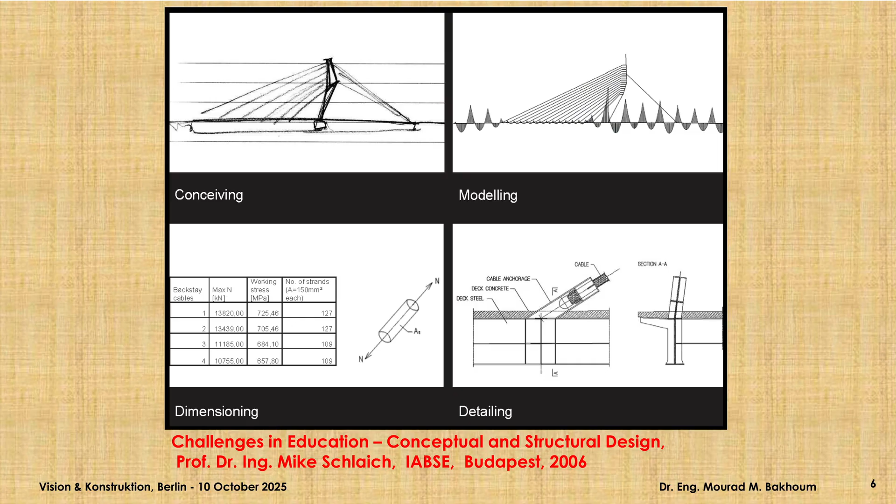Now I'm going to show a slide, which I wanted to say is the slide, but I thought maybe too much. So it's the key main summary slide for structural engineering education and practice. This slide Mike showed at the conference in Budapest in September 2006 in a keynote speech, Challenges in Education, Conceptual and Structural Design. It summarizes in a very nice way the stages of structural design: conceiving the concepts, modeling, structural analysis, dimensioning, and detailing. I use this in education, in graduate studies in particular, master students, and in my own thinking.

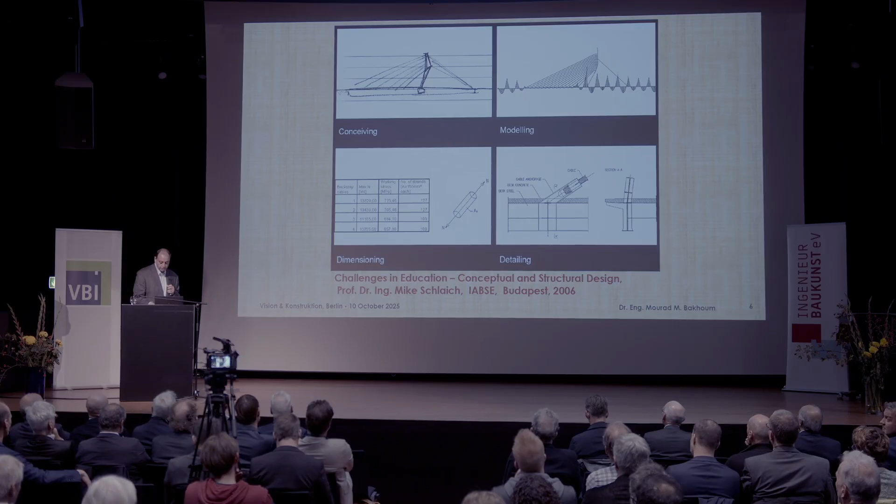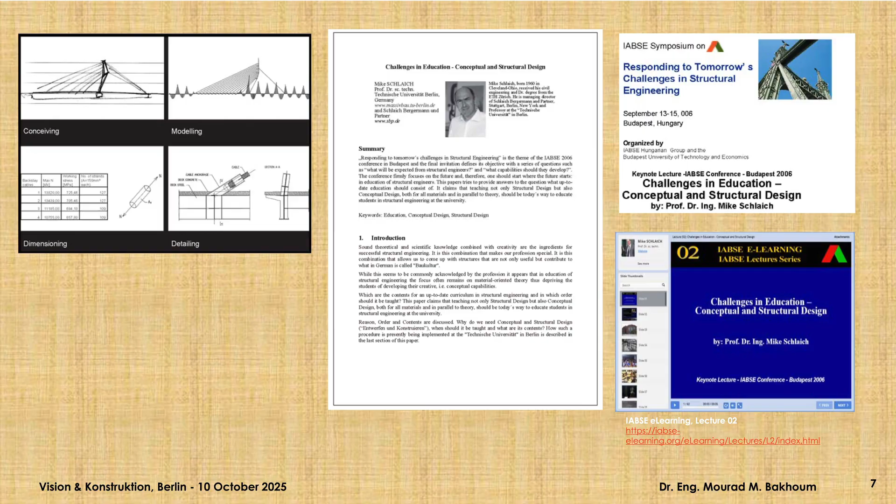And throughout the presentation today, I will try to show, to some extent, how this has affected the work I was involved in. So this slide comes from this presentation, this conference, and you can find it in the e-learning platform. If you just write Challenges in Education, the title of the presentation, and Mike Schlaich, IABSE e-learning, you will get the presentation in slides and audio. You can listen to it. It's very nice.

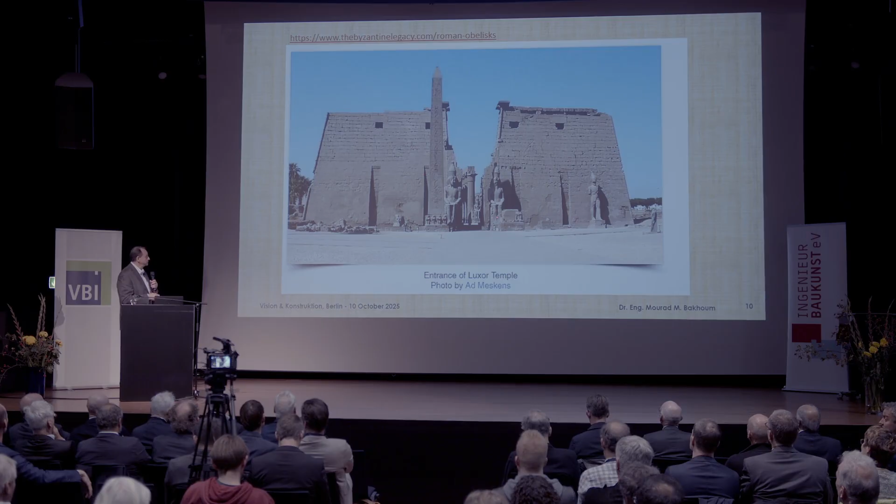So now, we'll talk about 2 modern obelisks, but at the beginning, we need to know some history. Obelisks existed in Egypt. This is in Luxor in the south of Egypt. This is the Luxor temple. There existed 2 obelisks. And the obelisks were built by the pharaohs starting about 3,000 years ago. So they are 1,000 years younger than the pyramids.

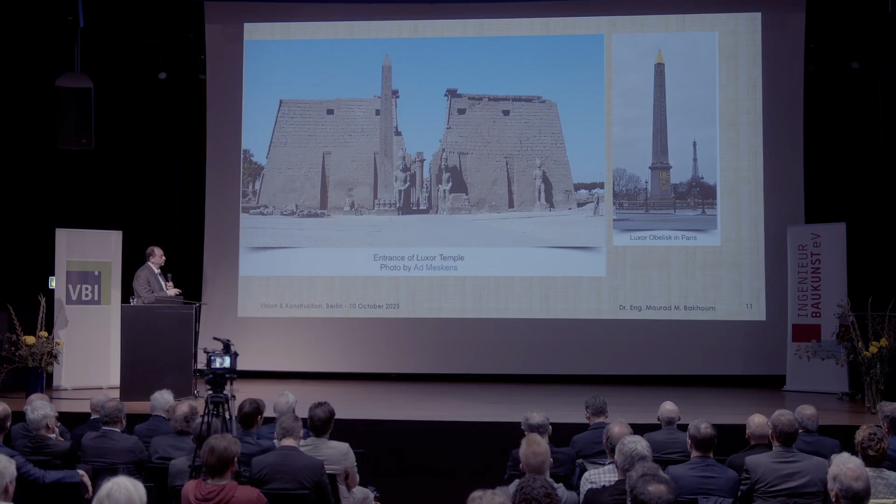And many other obelisks were transported from Egypt to Rome, especially from 100 BC till 200 AD, more or less. And then in the 19th century, some were transported to Paris, London, and New York. Just one thing to look at here. The pharaohs, when they built the obelisk, it was on a small foundation. And when it was moved to other cities in the world, they were put on a pedestal so that you can see it from far away.

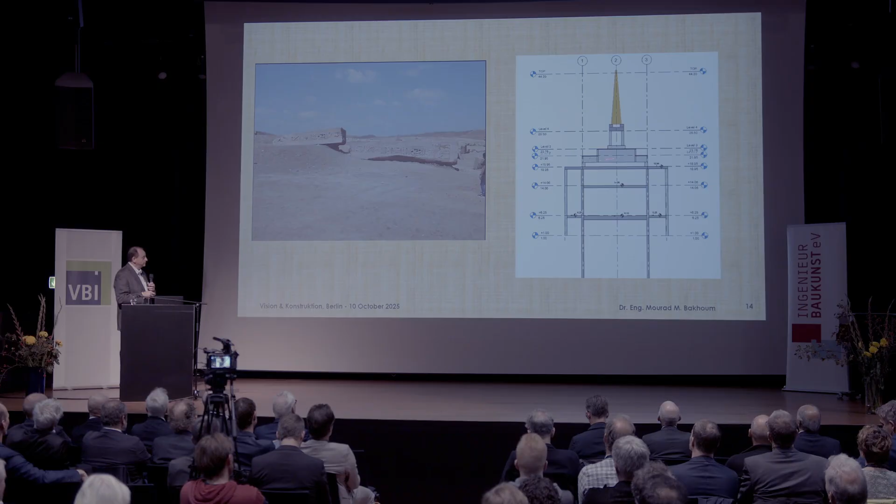I'll show some details about it later. If the height here is 16 meters, the span between the supports is also almost 16 meters. This structure was conceived by one of my professors. Our role here was just design review and supervision of the work.

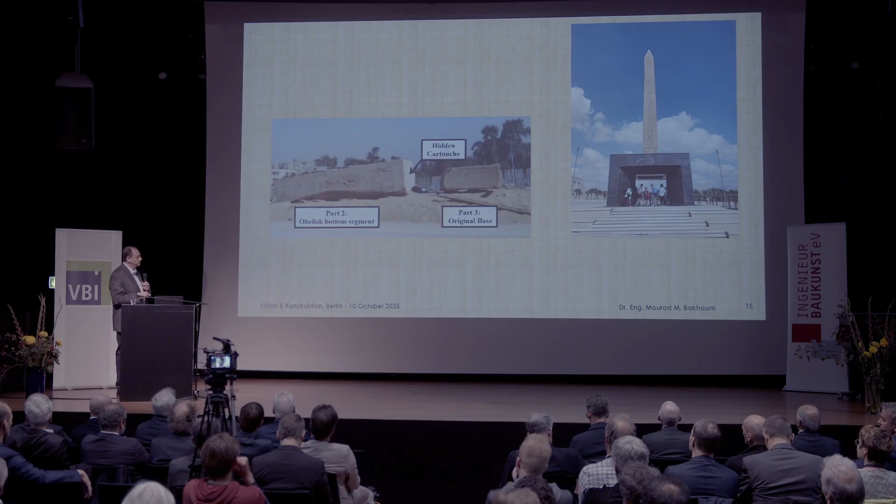So he thought, okay, we will make it a hanging or elevated obelisk so people could come and look at the stamp of the king at the bottom. It's King Ramses II. It's a very clever idea from the architect, but how to achieve it was a challenge for the structural engineers. Okay, this is more clear.

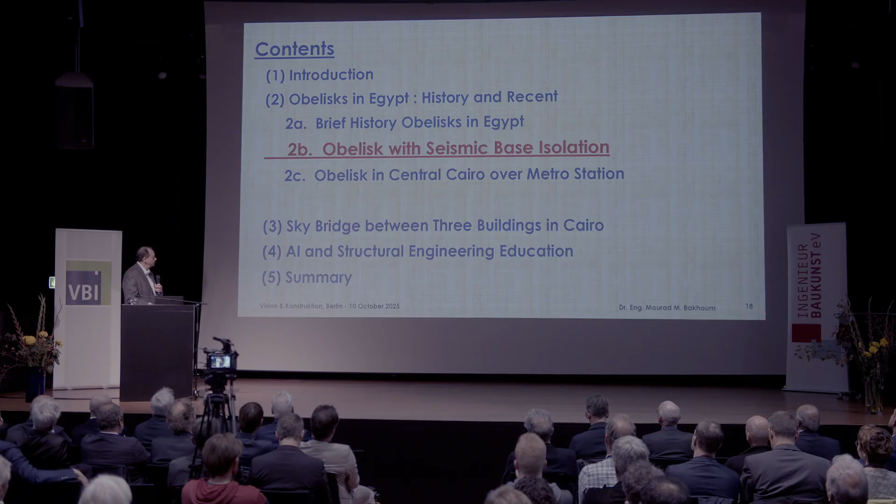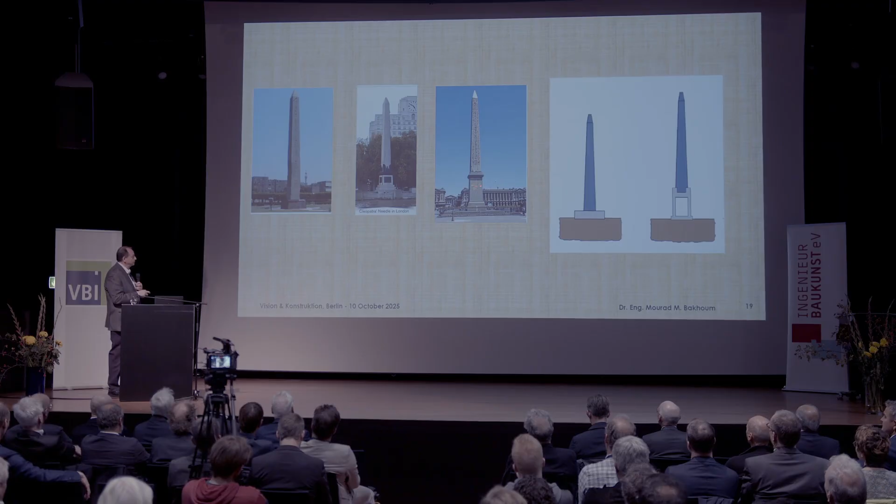So we'll start with the elevated obelisk with seismic base isolation. As I mentioned, this is one of the obelisks still in Cairo, in the Heliopolis region. Now this is in London, in Paris. Basically, this is a small foundation on the soil from the time of the pharaohs. Now it's elevated for display with this rigid structure, and the obelisk is embedded up here so it has its stability.

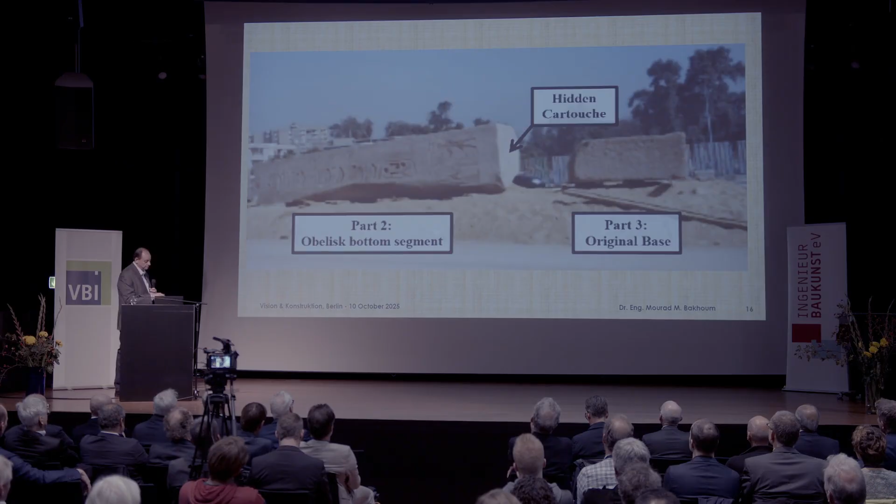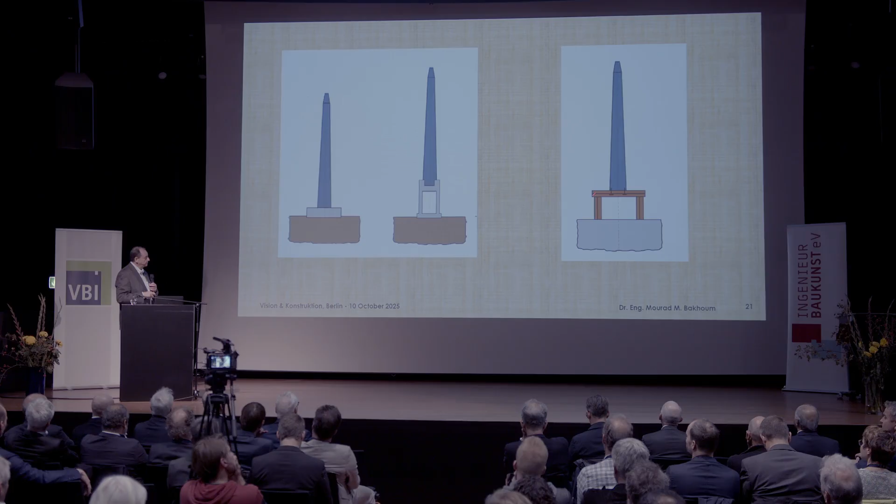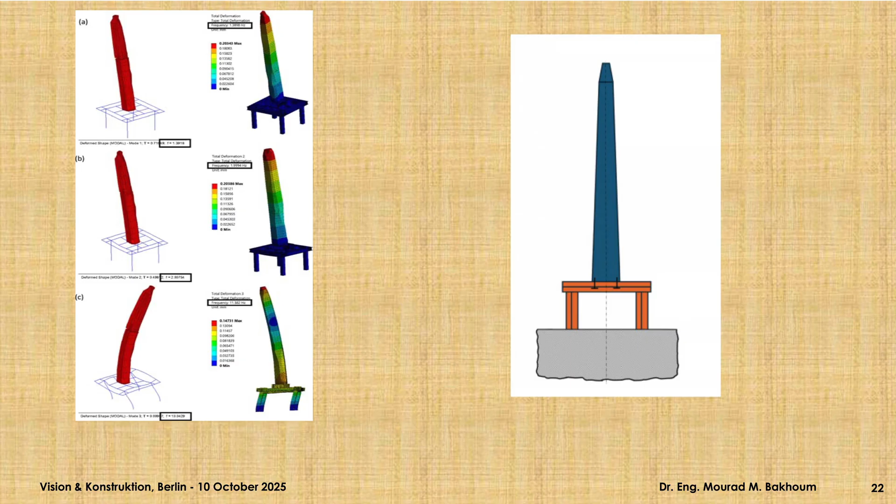What made the matter more complicated is that the obelisk is a square, but about 1/4 of it was broken since it fell many centuries ago. And we cannot increase the depth of this steel frame a lot; I think the architect didn't want it. The dimensioning of these elements is very sensitive. We have to respect the opinion of the architect because he wants to do something really innovative and very nice.

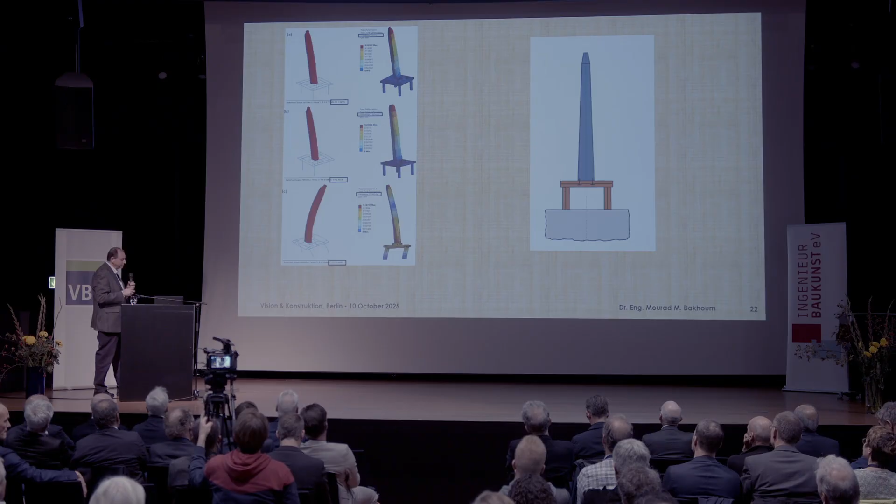So this was the concept part. We did the analysis, and we found that there is a lot of bending. This is the first mode, the second mode, the third mode. There is a lot of bending when we do this. There is a rigid connection between the steel column and the base, and the steel column with this beam is semi-rigid.

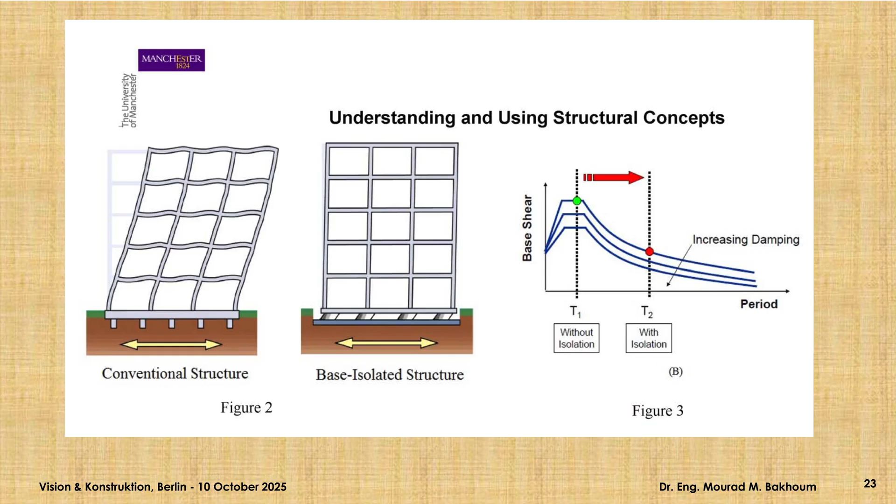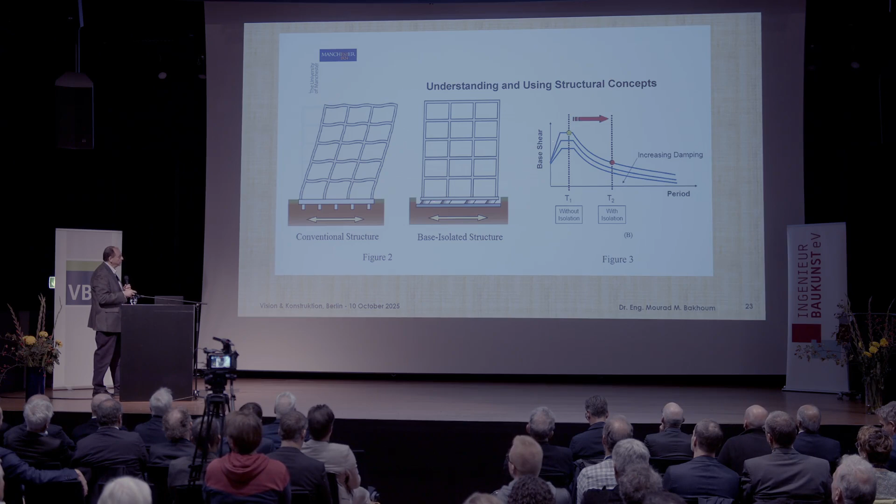So this is a schematic view of seismic base isolation. You can find it in many places, but this was from the University of Manchester. Lots of these developments are from Japan. With a conventional structure, you will get bending in the columns and in the beams. But with seismic isolation, the structure moves as a rigid body. So you can increase the period or decrease the frequency of the structure significantly, and then you get much less seismic force.

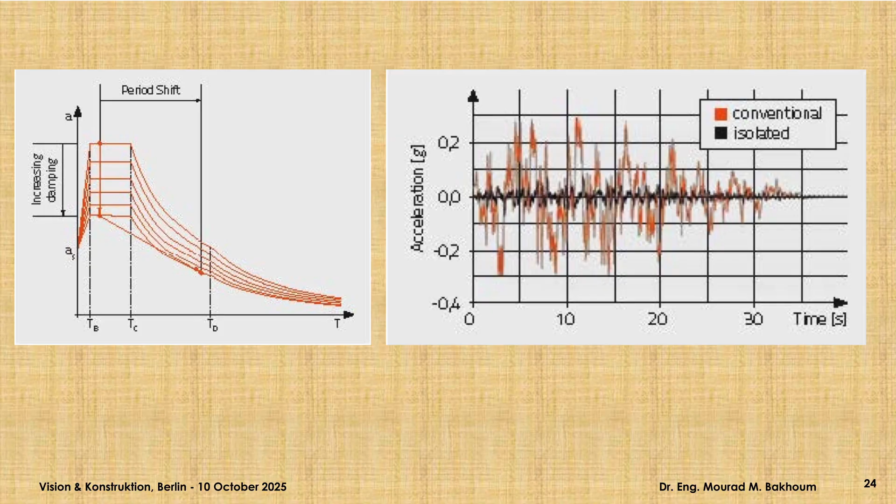This is from the brochure of Maurer, the developer of the bearings that we used. If you look at the time history, the red one is conventional, the black one is with seismic isolation. So instead of this, we used this. We have the seismic isolation bearings here, and this is the shape of the housing for the stone and the seismic isolation bearings.

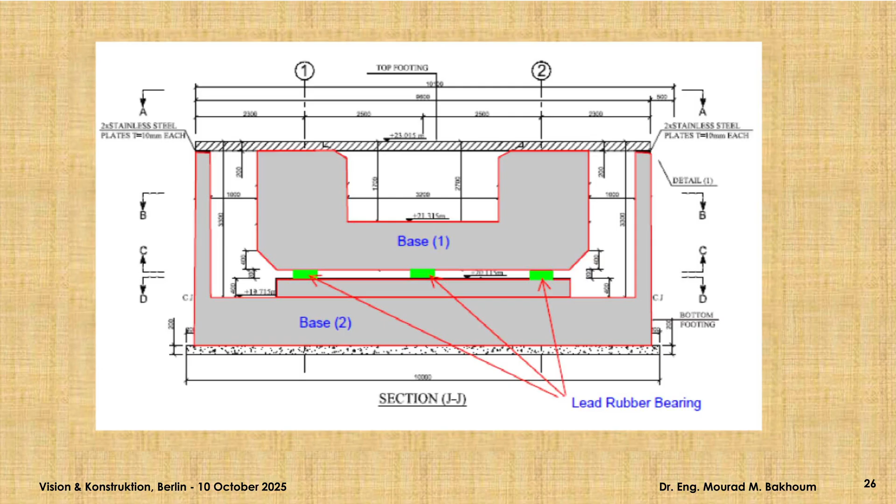When we talk about detailing, you can see this 45 degrees here. It was meant so that sometime in the future, when they need to change the bearings, the people standing here will have enough space to insert the jacks to remove the bearings. And this mass is also very important, because when you increase the mass of a structure, you increase its period of vibration, and then you get less seismic force.

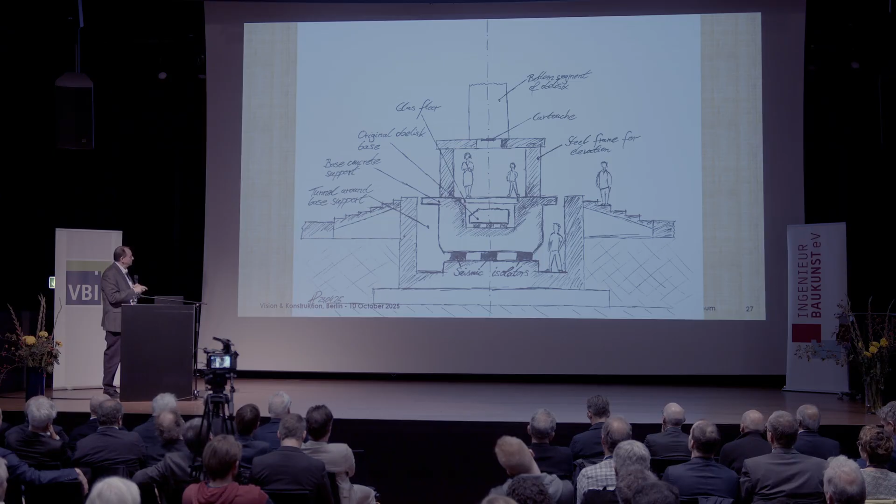So this was the concept basically: have the structure, the steel frames, with the obelisk on top. People could go inside and have a look at the cartouche here, and maintenance people can go and change the bearings in the future.

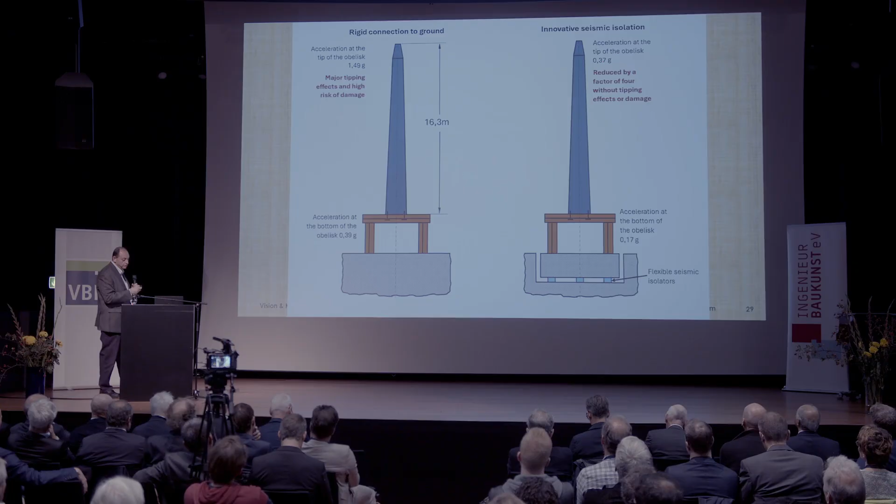Okay, so instead of this structure, we got this one. Now, if you put a time history record for the analysis, you get here 1.5 G. Time history, we used El Centro as an example. It's about 0.3 G or 0.3 the gravity, like 3 meters per second squared. Okay, so you get magnification here, and here it's more. If you put the 0.3 G, here you get almost 0.3 G. So the structure is moving at the same period as the earthquake.

Bearing from the time history record here, it was very high. The black one, which is the input, El Centro, it's California. And now, if we don't have the base isolation, that's the response of the top of the obelisk. And if we have the seismic isolation, it's almost the same. So the colors red and green are obviously selected to show this.

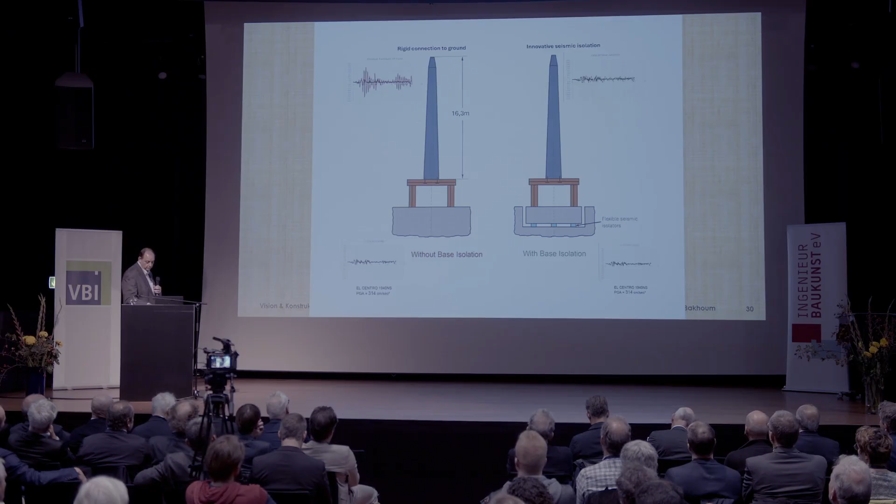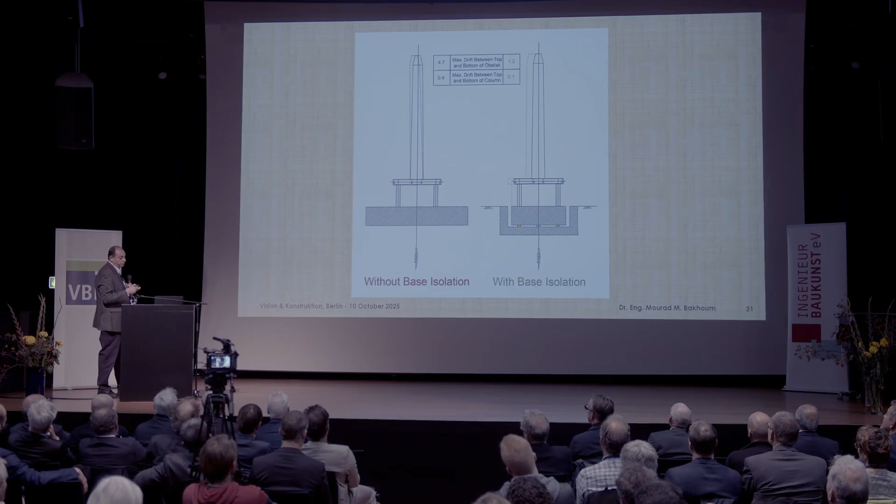What was very important is the tilting, because if we don't have the base isolation, we get tilting in the obelisk. And the maximum difference in deformation between the top and the bottom was 4.7 centimeters. And between here and here is 0.4. When we do the base isolation, the structure moves much more. It moves much more, but the difference between the top and the bottom is only 1.2 centimeters, so it moves like a rigid body.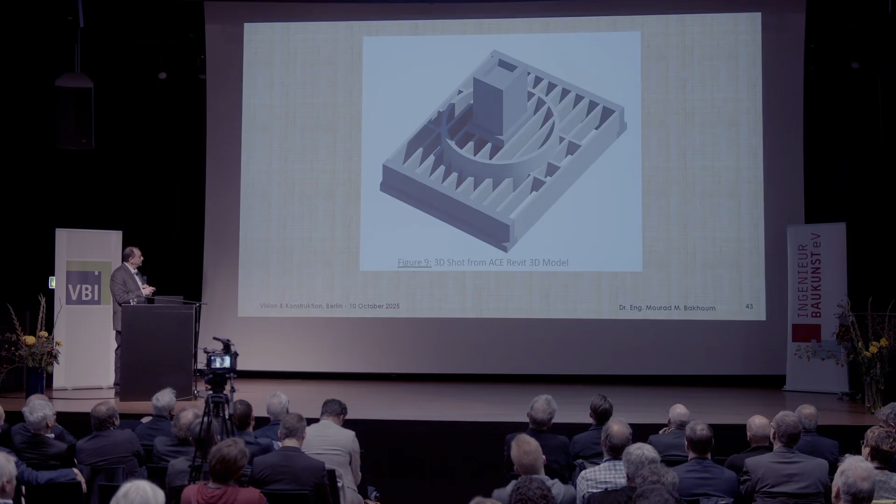And here comes the detailing. The detailing between these beams and the ring beam was very complicated. And everything is important: concept, the analysis, the dimensioning, and detailing. Also, the analysis, we had lots of discussions with the original designer. Do we have torsion or not in this location? And it depends on the assumptions in the modeling.

Now, we come to the third part of the presentation. Near to this obelisk in the center of Cairo, there is this nice modern building under construction. So this is how it looked like. This is the TV tower in Cairo, built in the 1960s. There is a big development in this area, overlooking the River Nile, 3 towers, and the architect will connect them in the top by this structure. The towers are about 100 meters high.

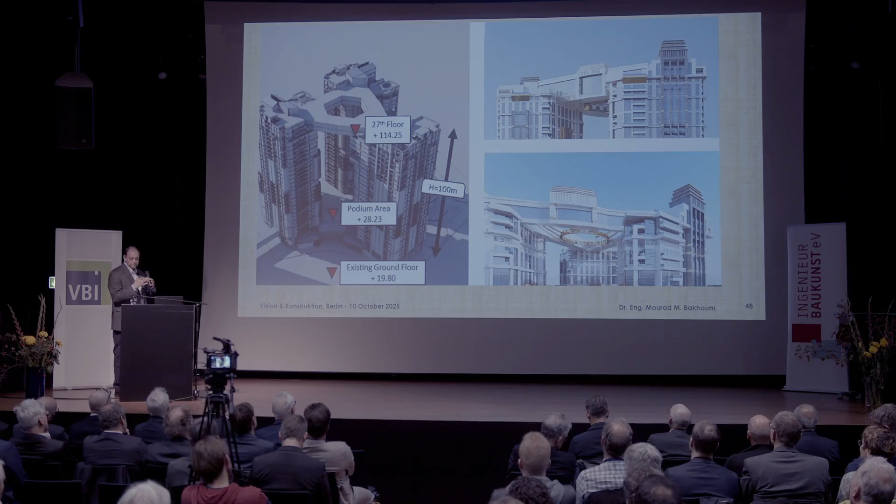Okay, so these are the 3 towers connected by a structure on the top. It's about 100 meters above the podium level and about 120 meters above ground surface. So this is how it was originally conceived, to have 2 floors of apartments in this area, but then it was reduced to a more modest and more realistic structure where we will have a walkway and maybe some of the equipment of the buildings will be put here, and then a ring like this to connect for architectural purposes.

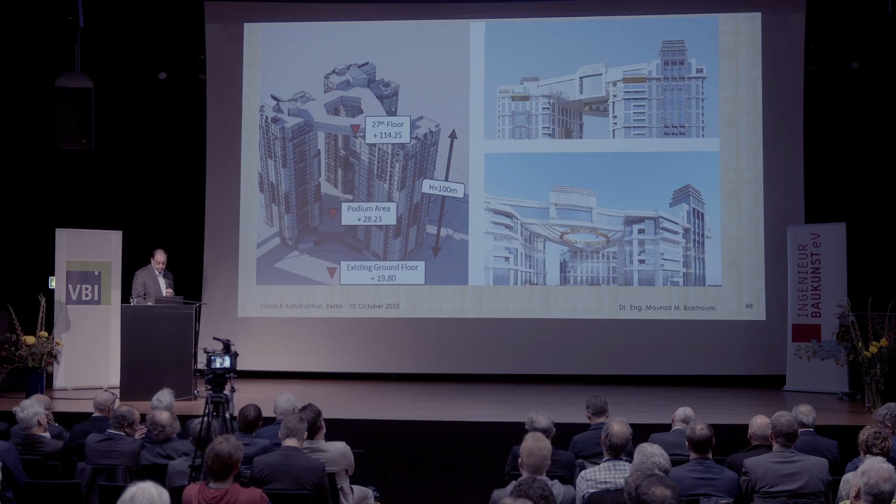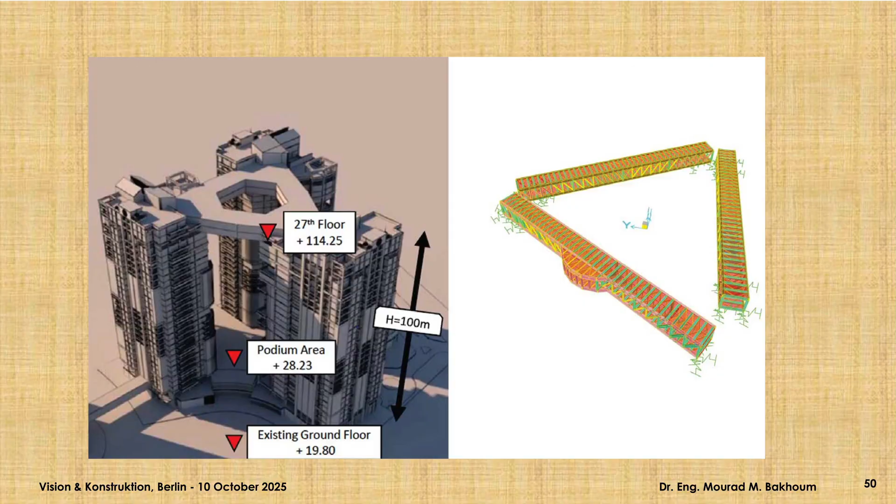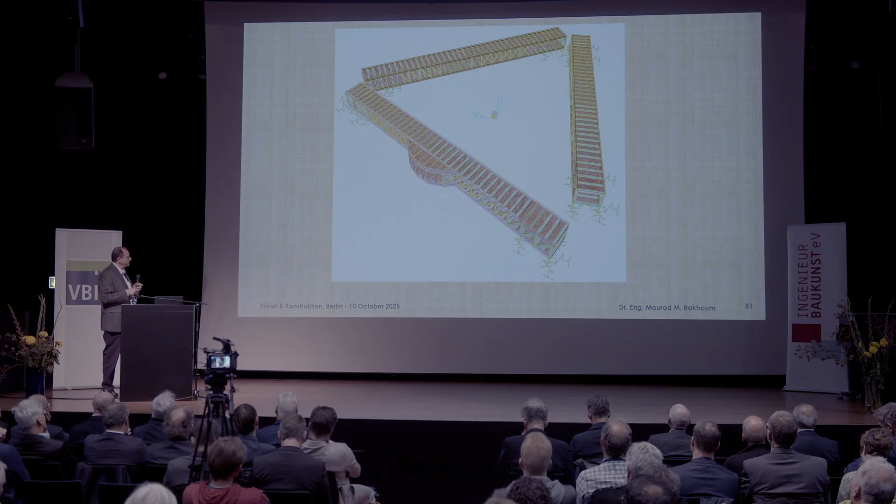Okay, so now how we'll build this will be 3 separate trusses. Okay, but a very important issue is how to raise these trusses and construct them in the top of the buildings. But another issue also is the support structure. This is the 3 trusses. We will look at this one. The first approach would be just have a simply supported truss between the edges of any 2 buildings. Okay, but I was concerned that this is a high risk, and if this truss fails or if the columns fail for any reason, this will be a disaster.

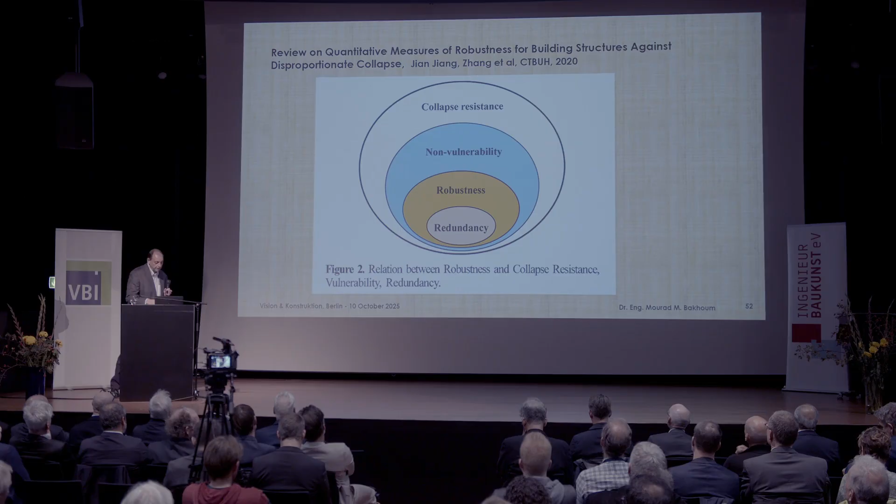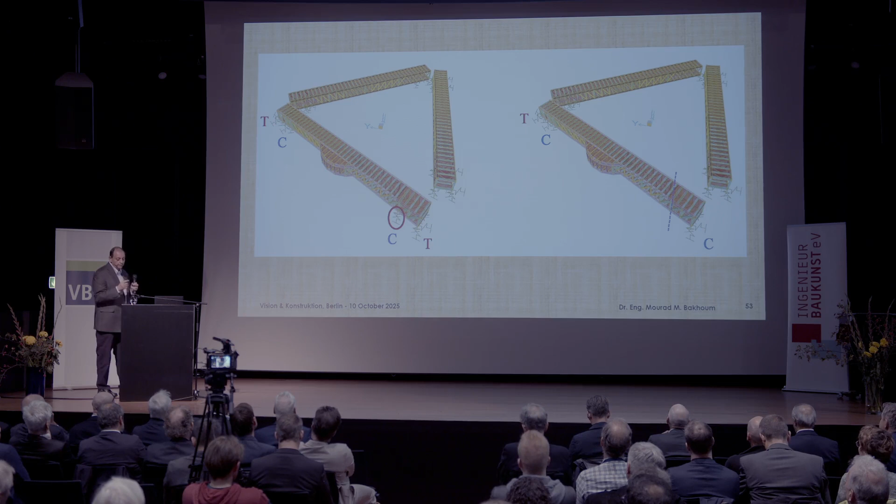Okay, and then we have to achieve robustness. So the idea was, now if we do this, obviously we'll have compression in these supports, but we'll have tension in these supports. Then we'll have to think with the bearing companies how to handle this tension.

I will finish in 2 minutes.

But why this? The idea is, if we lose a column or if we lose a support here, this tension support will become a compression support. So this structure will be designed for the issues of serviceability, and also in case of earthquake, the glass doesn't break, and for the ultimate limit state. But this structure without the support here and the support just at the edge, only for the accidental load case, doesn't fail and then is repaired later.

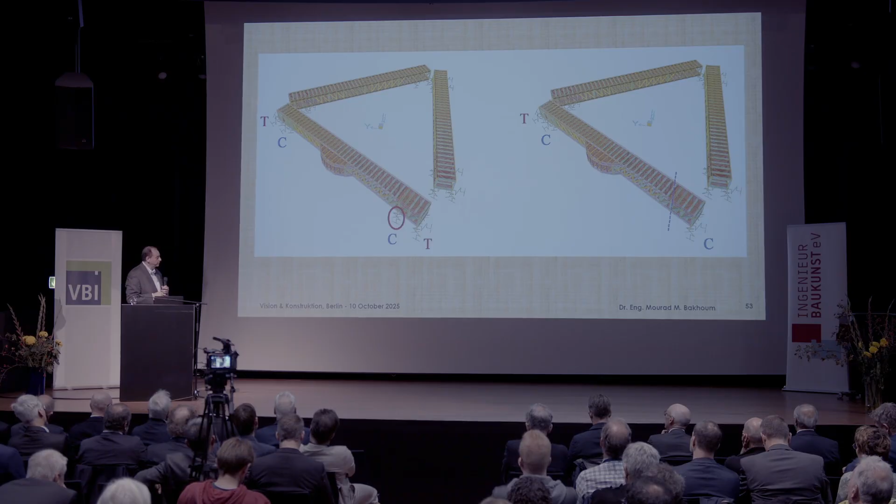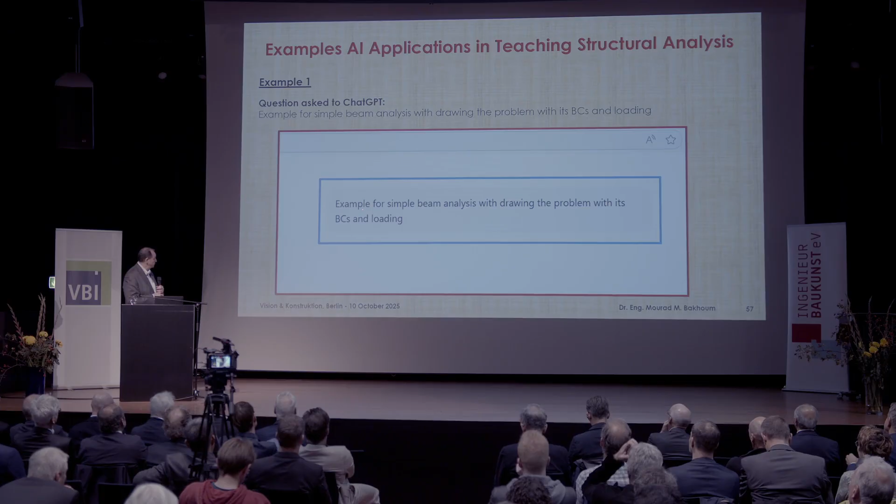Okay, so redundancy: with having a structure more redundant, we achieve robustness. The last thing, just in 1 or 2 minutes, AI and education. I teach structural analysis. Mainly my issue is teaching structural analysis and bridge engineering as a graduate course. So we asked ChatGPT for an example of a simple beam analysis with drawing the problem. Okay? So this was the question.

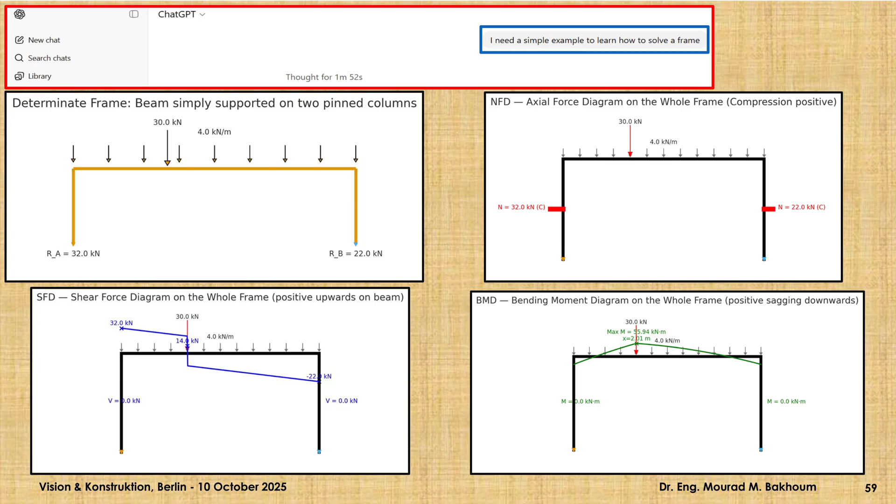He did everything with the calculations. I was amazed at this. What will my colleagues do? Okay, I am retired now, but what will my colleagues do in 10 or 20 years? We did a frame also. But what was really amazing is this. These are, we can say, quantitative analysis by ChatGPT. You put a load, you compute the bending moment, you compute the shear. But here is different.

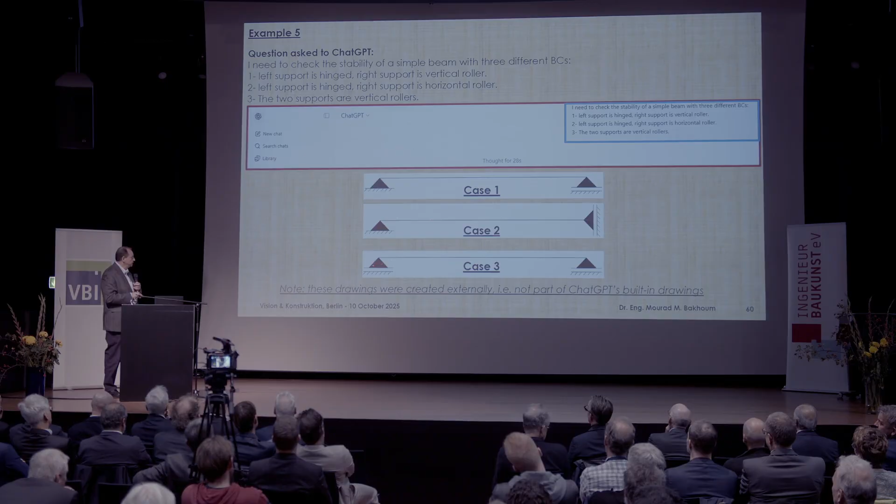This is a question about stability and determinacy of beams and frames. This is a simple beam, hinge and roller, static case. If you rotate this hinge and make it horizontal, this beam becomes unstable because all the 3 reactions will meet at this point. If you make this on 2 rollers, it's stable only for the vertical loads and not for the horizontal loads. And I thought that the AI would not be able to solve it. But it did.

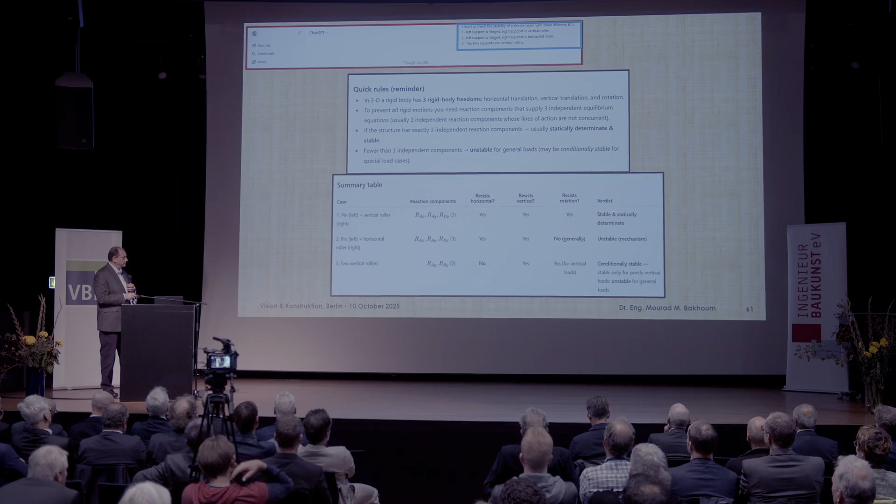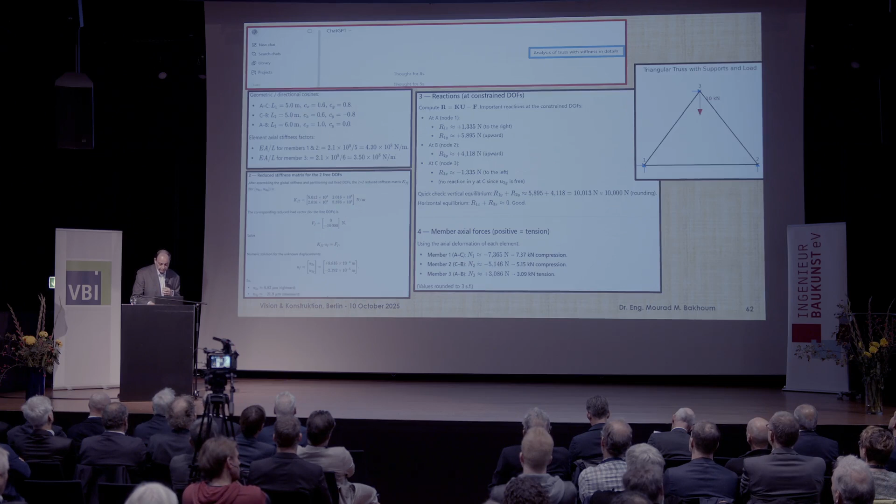First beam, it says stable and statically determinate. Unstable, you have a mechanism. Conditionally stable. I was amazed that ChatGPT said conditionally stable. This is, if you can say, qualitative knowledge and not quantitative knowledge. And so this raises questions. I don't have answers, but these are questions. How advanced is the software that is available now for artificial intelligence? So maybe we can have a discussion about that in the break or after we finish the conference.

Okay, so in my presentation, in the introduction I talked about the very important slide by Mike Schlaich, and I think it should be very much widespread in education and to practicing engineers. 2 obelisks in Cairo, the Sky Bridge, how to try to achieve robustness, and AI in education.